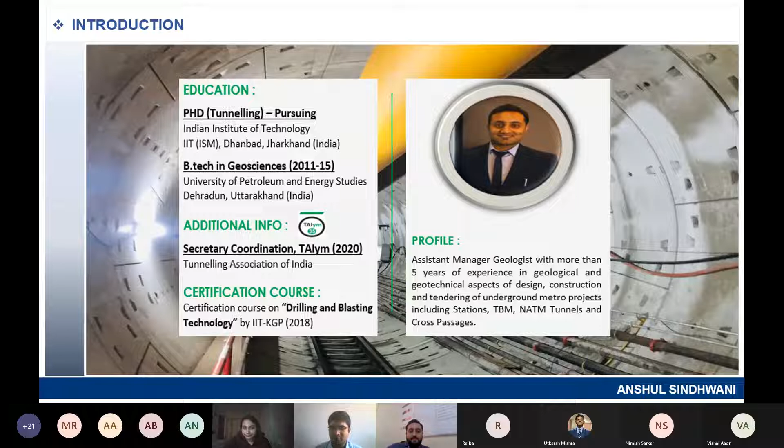So moving further to the topic, probably this is the slide most favorable, or I should say the slide which you have already learned so much about.

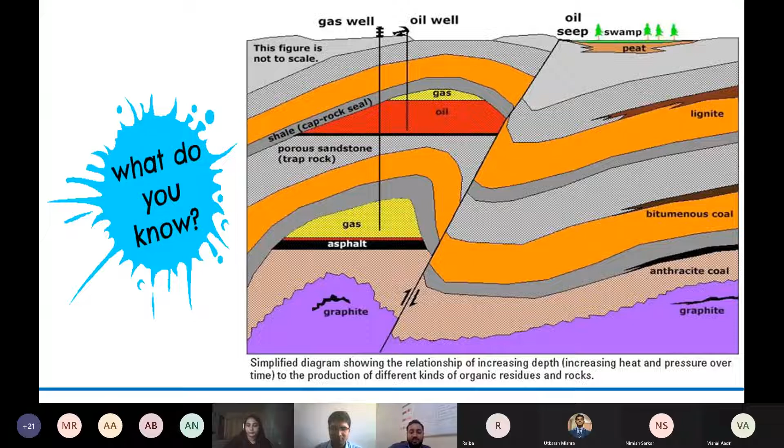Of course, it's visible that it is an anticline, syncline, fault, where exactly the gas is trapped, cap rock, reservoir, shale. These terms are probably very common for you by now since you are already pursuing from petroleum background. But what we are going to learn today is all about urban tunneling projects.

As you can see in the image, there are machines digging down below the buildings. The one is basically for metro. Most of you have already traveled across India, mainly in Delhi, Kolkata, Chennai, Hyderabad, in these underground metro trains, but you may not have been fascinated by how exactly it is being built. So this is probably the right time I'll be sharing it with you.

Just next to it, what you can see is a road tunnel where vehicles are going. This particular tunnel is being planned or constructed specifically for metro, whereas these are for road tunnels. The next one you can see is an underground basement being constructed mainly for parking. So all what I'll be discussing today is below ground things.

You might have seen metros running above the road as well, but my topic would be specifically restricted to the underground works being carried out all across the world.

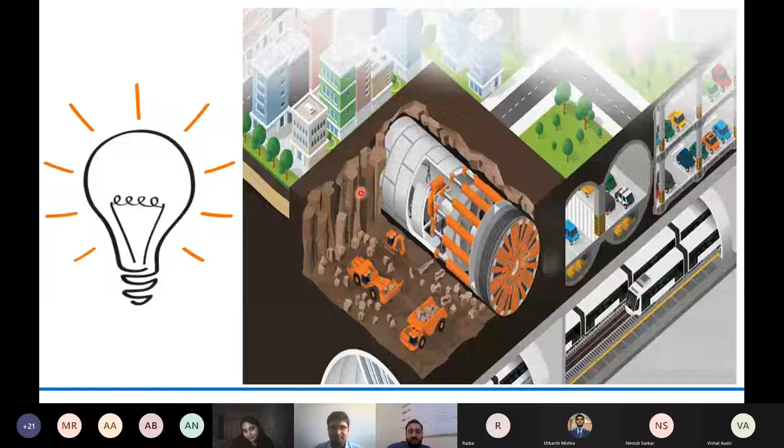Moving further, I'll brief on what I'll be covering today: starting with urban tunneling, what it indicates, what specialized team is needed for this sort of project, then basics of tunnel construction, the role of geology, geophysics, and mining in these projects, what are the challenges, and what are the career opportunities for you.

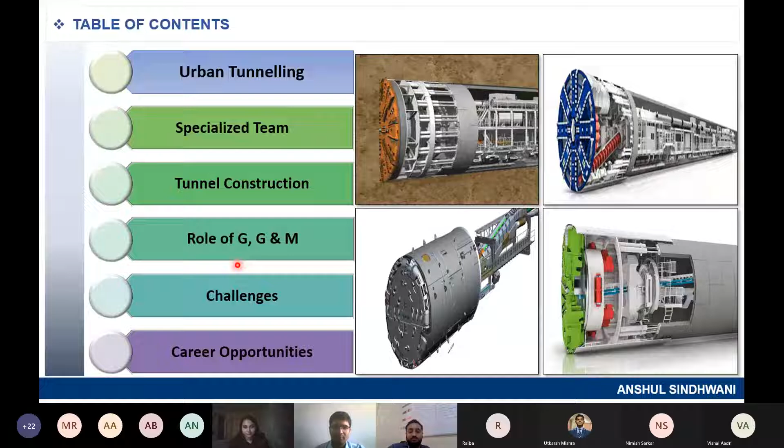Like I said in the beginning, this would be an eye opener because most of you are actually focused on oil and gas, and you may not have seen how much opportunity there is in these sort of underground projects. So what exactly is the topic known as urban tunneling?

Tunneling is nothing but a way to create space below ground for many purposes. Like I explained earlier, it could be for roadways, railways, utilities, or basements. Nowadays, many of you might have heard of a particular building in Norway where they have made something like an ice skating facility. There are many things they have built so they can earn money by taking money from tourists. So there are many applications.

I'm not exactly able to recall the name of that particular building. It is there in Norway. Norway is famous for underground spaces. As you can see on the right side, there are a lot of buildings on top, and two tunnels coming out — one going towards the city, and one coming out from the city. Nowadays, many cities in India have this sort of planning, or many projects are already under construction.

So how exactly it is being built is the question here, since we are talking about urban tunneling. The unique challenge is, since we are working below these buildings, imagine how is it even possible. As basic knowledge, if these buildings are going to remain there and these tunnels are going to be built, what is the main unique challenge that we'll be facing?

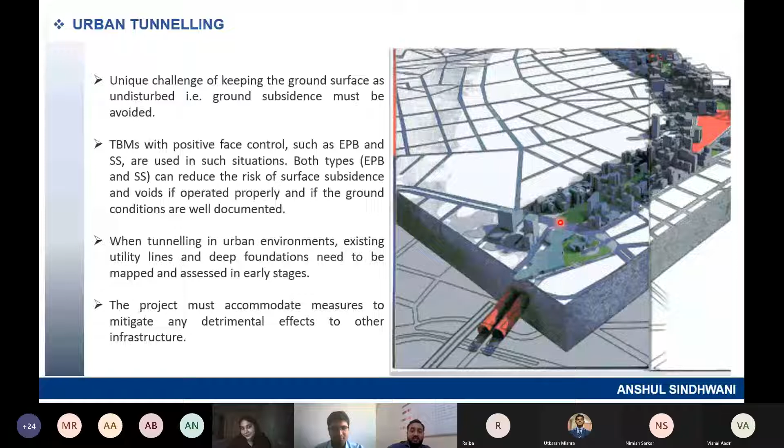Now when we are tunneling in these urban environments, there are existing utility lines like electricity, telephone, gas pipelines. All these will also be disturbed when we tunnel below the surface. So these projects definitely accommodate measures to avoid any detrimental effects to other infrastructure — meaning buildings, a cricket ground, a university, or any sort of structure that needs to be protected when building these sort of projects.

So basically there are two components in urban tunneling. One is the cut and cover box, from where one is either going to go in or come out, and then there is the tunnel part. Now these tunnels can be built by different methods that I'll explain later.

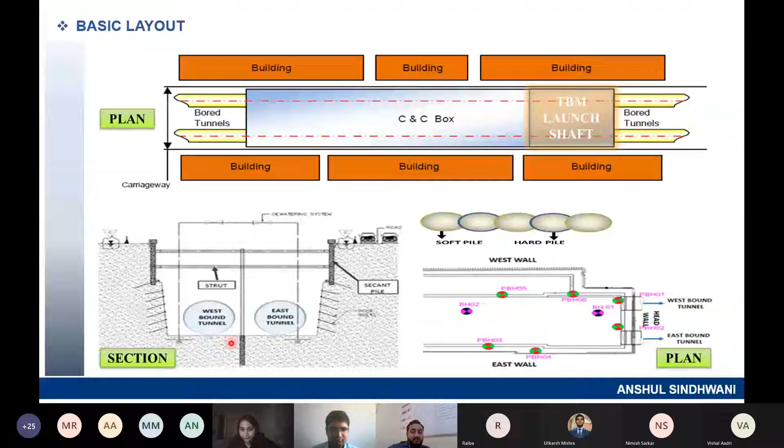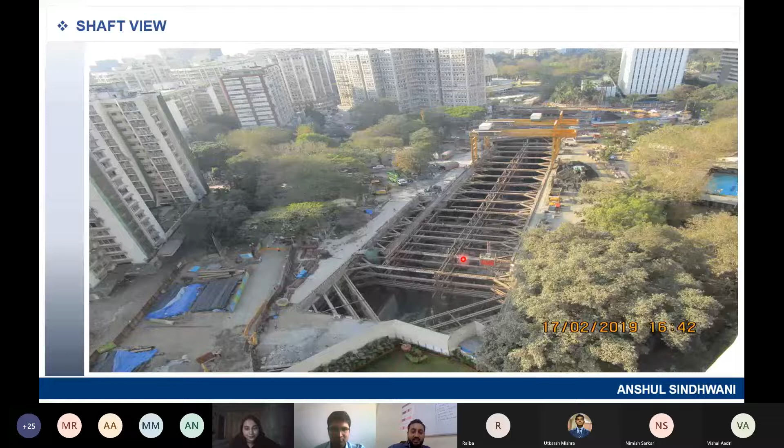During the construction stage, this is one of the stations we are constructing in Mumbai, near Nariman Point. Probably many of you are from this place and aware of it. As you can see, on all four sides we have buildings, and in between there is a station from where tunnels will be on both sides, one on this side and one on this side. Of course there are twin tunnels, so one is coming in, one is going out. This is how it looks during construction. Once the station is built fully, there will be no object visible on top, only entry points, so this place will be restored as it was before construction started.

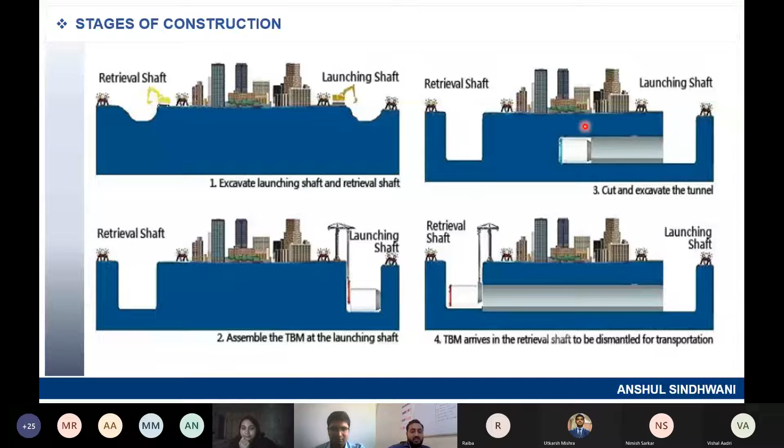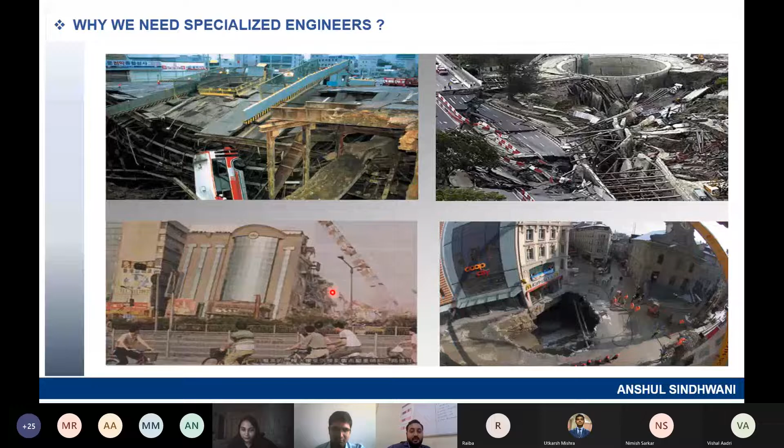So why am I explaining all this? It's to give you a feeling of why geology, geophysical and mining engineers are actually needed for these sorts of works. This cannot be done by anyone, or I should say only civil engineers - it's not possible at all by civil engineers alone. Imagine high-rise buildings on top, and you need to create a hole below the surface. Is it really possible that these buildings will stay safe? There are certain risks, but they can only be mitigated by these specialized engineers I was referring to. Imagine if these projects were only built by civil engineers with no geologist, geophysicist or mining engineer involved - you can see in images how catastrophic collapses can happen. I'm not saying these projects are being built without geologists and other engineers. All I'm saying is how catastrophic failures can be if even certain ground importance is ignored at any point of time.

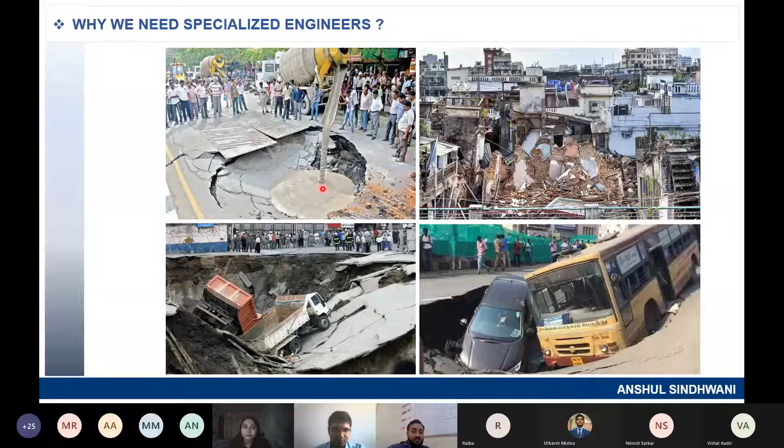So all I'm trying to give you a feel here is that for all these sorts of works, there are specialized engineers required, which I have already mentioned. Otherwise, you can see in these figures how catastrophic failures can happen.

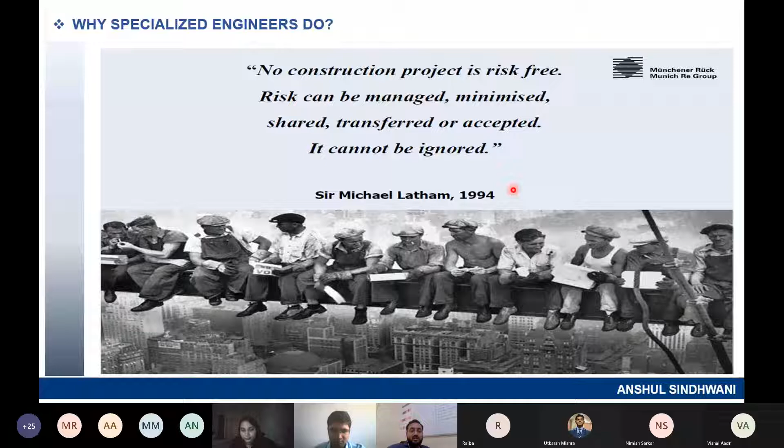Why we need specialized engineers is because these engineers can manage the risk, minimize it, share it, transfer it, or accept it. It cannot be ignored. When I am there as a geologist working on these projects, if I feel there is anything important to communicate to higher management, I do it, because I cannot take the risk of any building collapsing in front of my eyes. Similarly, specialized engineers work in their own departments to ensure all buildings are safe and whatever we construct should continue to stand forever.

Now, there are two components in this: one is tunnel, second is station. The station, I've already told you, is a cut and cover construction.

Tunnels are constructed by different methods. There are two main methods: one is the drill and blast method, and the other is tunnel boring machines. Those from mining will definitely be aware of blasting activities carried out in mines. Tunnel boring machine is a mechanized tunneling method, done all across the world. It is one of the most advanced machines available and one of the most used worldwide.

Now, for constructing tunnels by these two methods, there are different approaches available: one is the New Austrian Tunneling Method, one is the Norwegian Tunneling Method, and then there's the Adeco-RS. There are also different tunnel design methods available. I haven't kept this presentation at a very micro detail level, because you may lose your way. I've kept it introductory, so you at least come to know this side of things as well, not just the part you're mostly studying, which is oil and gas.

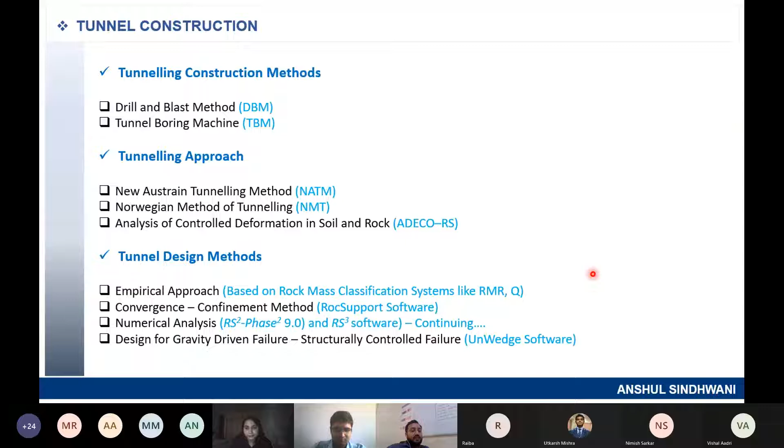So a tunnel boring machine is a mechanized tunneling method. What you can see is circular tunnels. As I said initially, it's built for different purposes—for example, for metro, the diameter of this TBM is mostly around 6.5 to 7 meters. Whereas the mega TBMs used around the world have a maximum diameter of around 15 to 16 meters, and the minimum diameter available for utility tunnels is around 1 to 2 meters.

Basically, what this machine does is mine whatever is in front of it—it could be soil or rock. Depending on the type of ground conditions, which is where the role of the geologist comes into picture, the type of machine will be decided. There are different types. Before moving further, I'll show a short video on TBM so you get a gist of what I'm talking about.

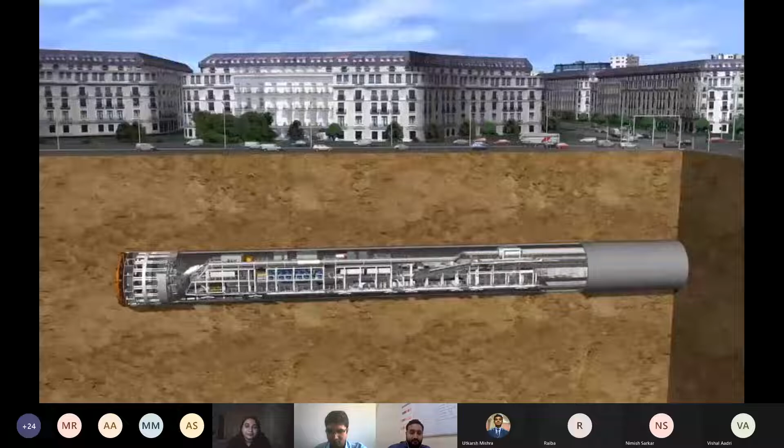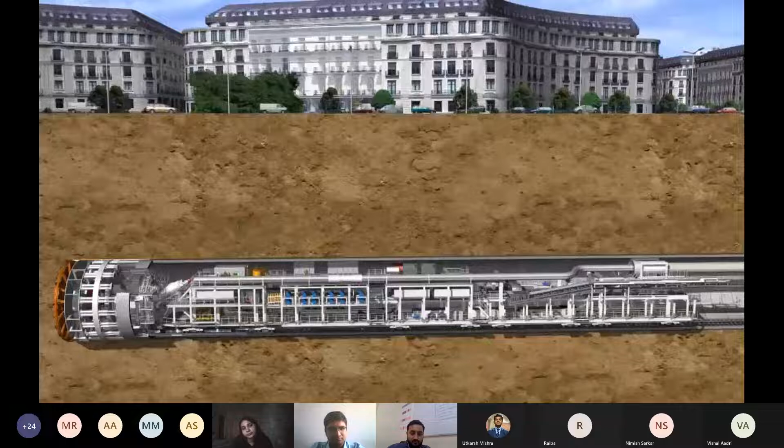Zona Universitaria. The tunnel route crosses beneath Barcelona's historic city center, densely populated residential areas and roads. In order to avoid any damage to sensitive buildings, subsidence, heave, and vibrations must be avoided at all costs. In addition, the impact on traffic above ground must remain as small as possible. The S442 is a classic EPB machine with an outer diameter of 12.06 meters and a total length of 95 meters.

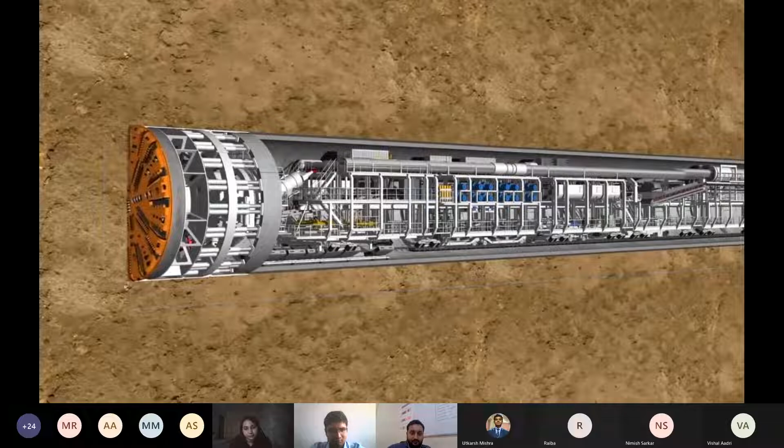With its rotating cutting wheel, the tunneling machine breaks the material from the tunnel face. The material is then transferred to the belt conveyor system in the rear of the shield via a screw conveyor, while the hydraulic cylinders press the machine forward continuously.

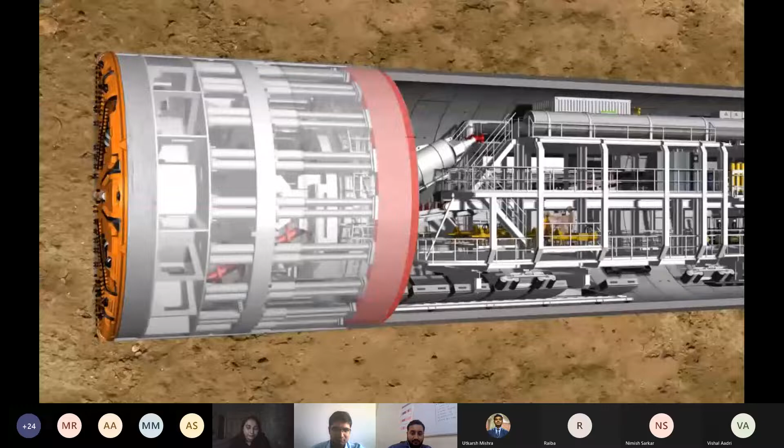The reinforced concrete segments, known as lining segments, are installed under the protection of the shield skin. When the ring building has been completed, the machine can push itself against the new tunnel ring and drill further into the soil.

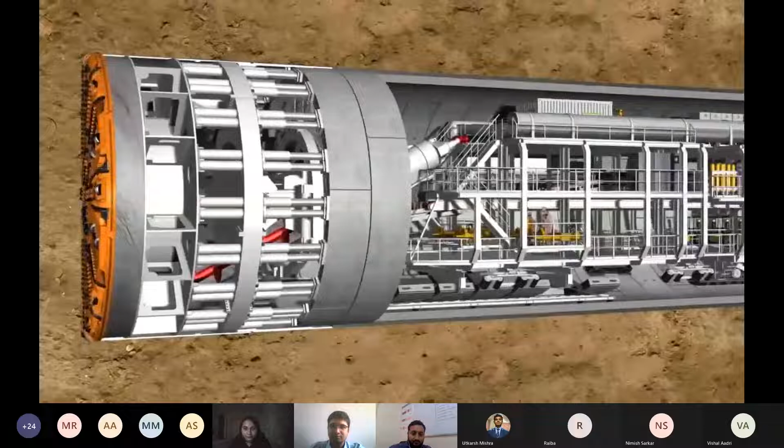The 83-meter-long backup accommodates all logistic facilities necessary for the operation of the overall system. The working method of an EPB shield is basically made up of two phases, the tunneling phase and the ring building phase.

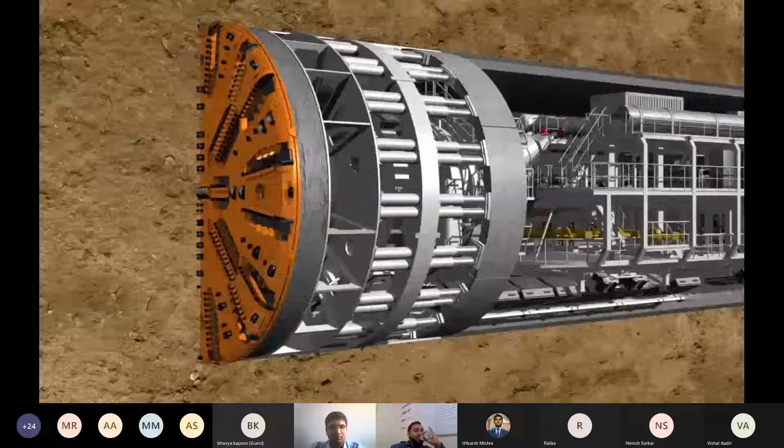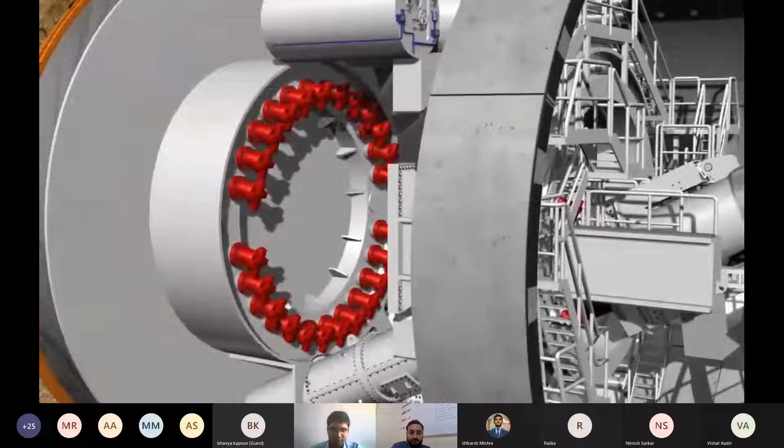During the tunneling phase, the cutting wheel, which rotates at a speed of up to 2.7 revolutions per minute, is pressed against the tunnel face with a pressure of up to 400 bar by means of hydraulic cylinders. 24 hydraulic motors drive the cutting wheel via a gear rim, developing a drilling torque of up to 38,000 kilonewton meters.

Under this high pressure, the disc cutters and cutting knives made of high-strength steel loosen the material at the tunnel face.

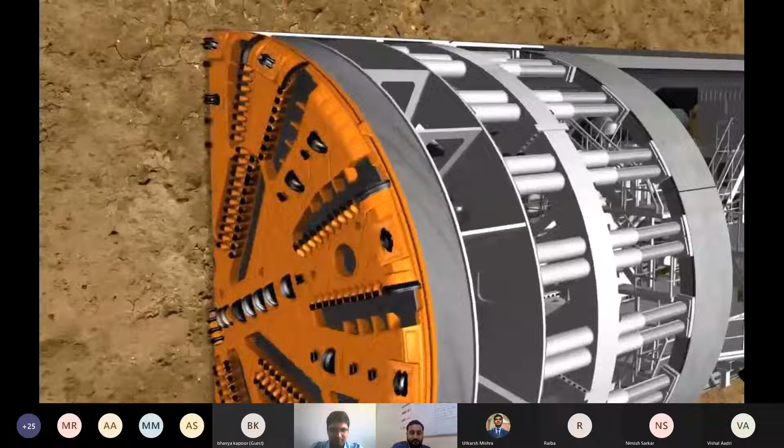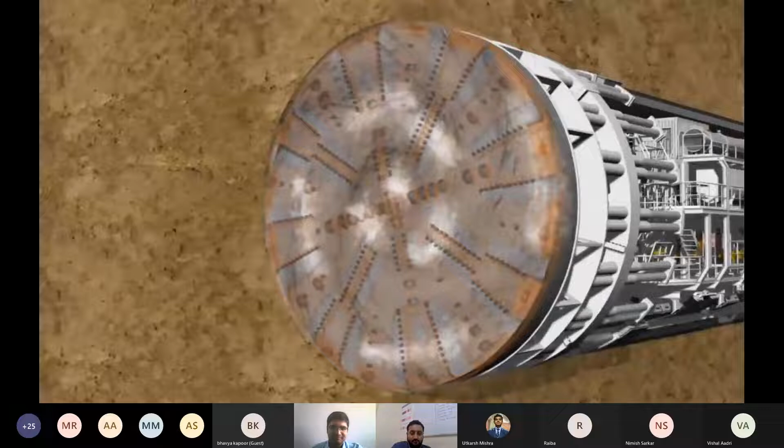If necessary, the soil can be conditioned with water, bentonite, or foam using the injection systems located on the backup. With the help of nozzles integrated into the cutting wheel, the corresponding conditioning medium is injected into the soil, which is pressed into the excavation chamber by the existing earth and groundwater pressure.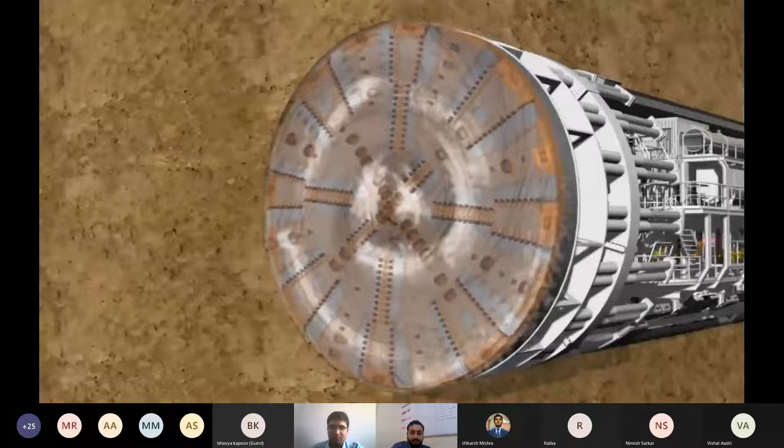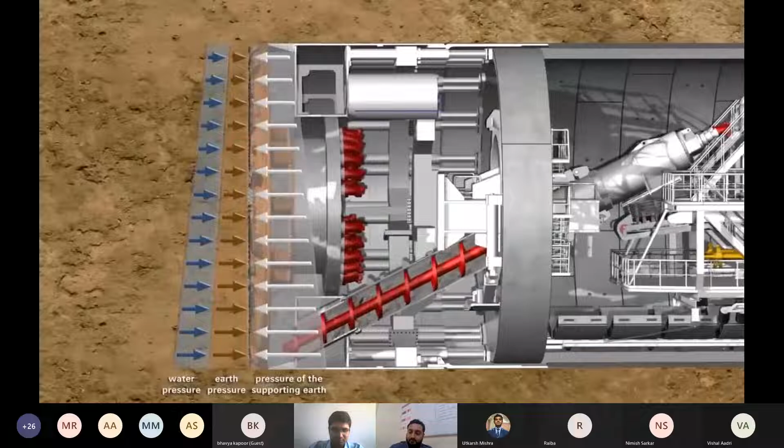For shield tunneling in non-stable soils, a loss in stability at the tunnel face is compensated by creating a support pressure. In the case of the earth pressure balance shield, the soil which was excavated by the cutting wheel is used to support the tunnel face.

In order to reach a state of equilibrium, the support pressure is transferred by the hydraulic cylinders via the bulkhead to the soil, which avoids an uncontrolled penetration.

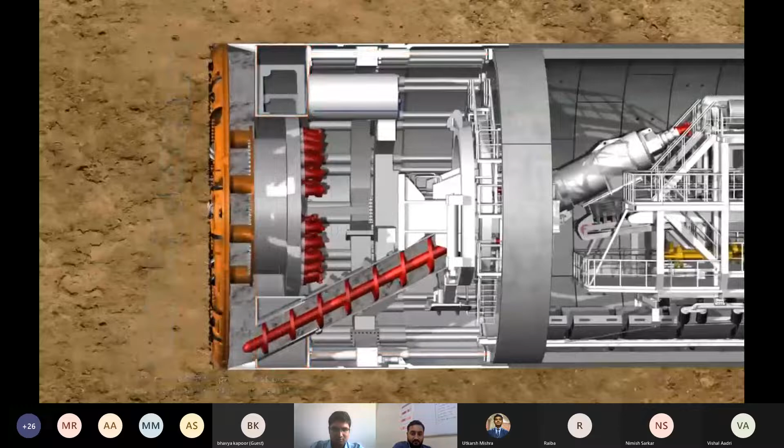The soil prepared in this way can now be transported from the invert area of the excavation chamber to a belt conveyor by a screw conveyor. The screw conveyor is driven by 2 hydraulic motors which have a power of up to 400 kilowatts.

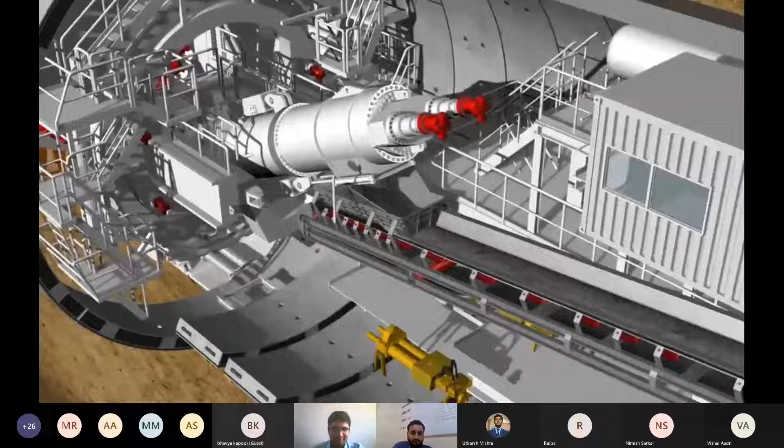The quantity of the soil taken from the excavation chamber is regulated by the screw conveyor's rotational speed, which is matched to the advance speed. The aim is to maintain a state of equilibrium between the quantity of soil removed by the screw conveyor and the quantity of soil accumulated from the shield's tunneling process. This guarantees optimum support for the tunnel face.

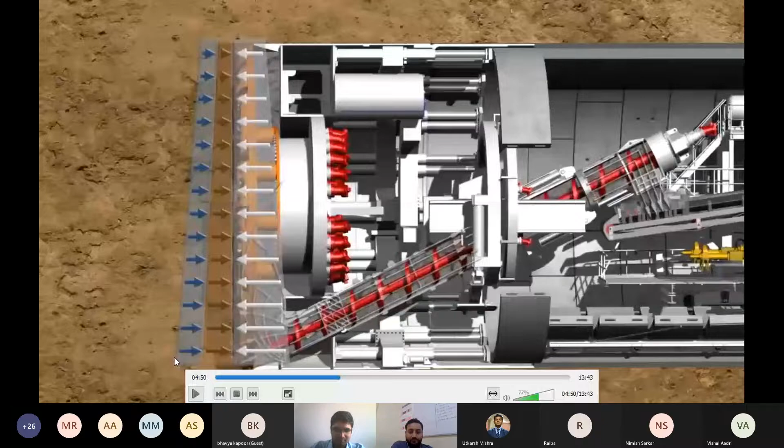So I hope you might have understood the TBM, how exactly it works. Of course, it's a basic idea, and the intention is just to introduce what exactly these TBMs are, how exactly they move forward.

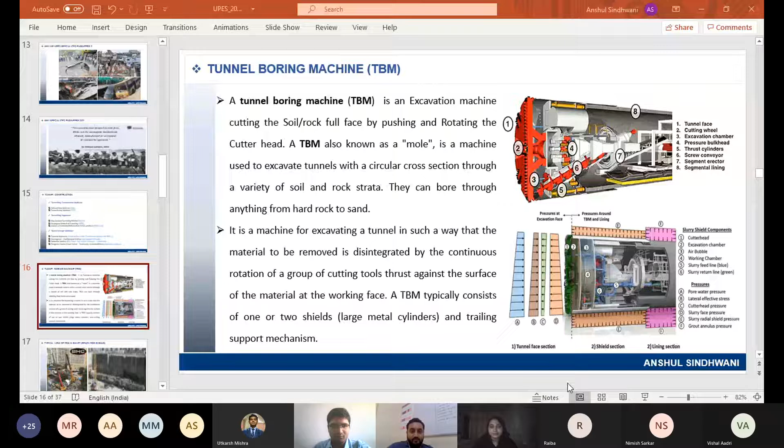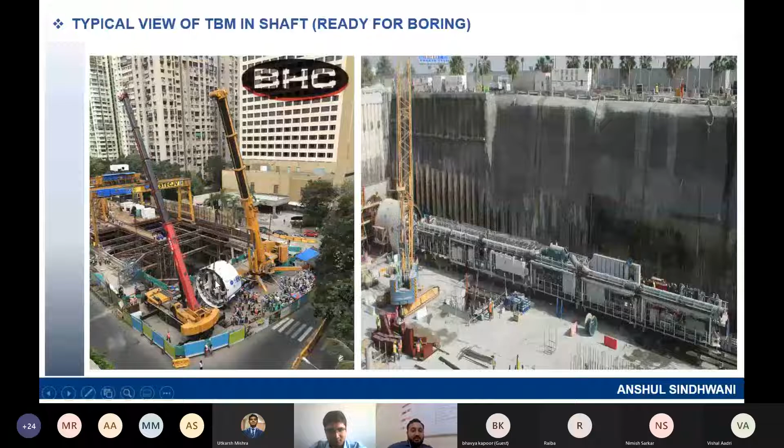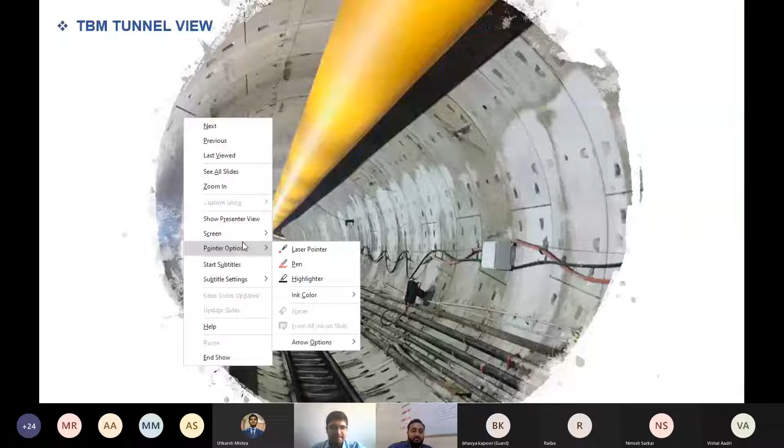So you have already seen in the video that when the TBM is moving forward, basically these concrete segments are being installed at the back, and you can see now a finished tunnel, how exactly it looks like. You might have already seen this while traveling in metro. Of course, these much lights are not there when you are traveling between two stations, but this is something how it looks like.

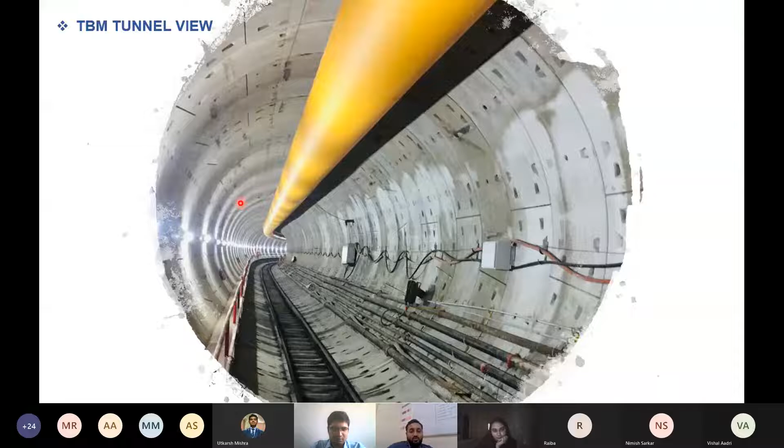Like I said initially, there are two methods by which we can construct a tunnel. One is TBM, which is nothing but tunnel boring machine, and the second way is to do it by NATM, which is new Austrian tunneling method. So this is how we build a tunnel. Of course, the rates are different in different types of tunneling.

So what we do in these tunnels is we drill holes on the face, then we charge it, and then we blast it. The same case happens in mines, the same way we also build, though of course the method of construction is different. Like I said, it's the new Austrian tunneling method, whereas in mines there are different methods being adopted at different places. Then what we do is install different sorts of supports because we are excavating this.

Imagine if this is soil and you are creating a hole below 20 meters, everything will collapse and it will not retain. So like in the machine also, you might have noticed that an equilibrium has to be maintained. In this case also, if you are not providing any support to the ground which is exposed by this hole, it will collapse.

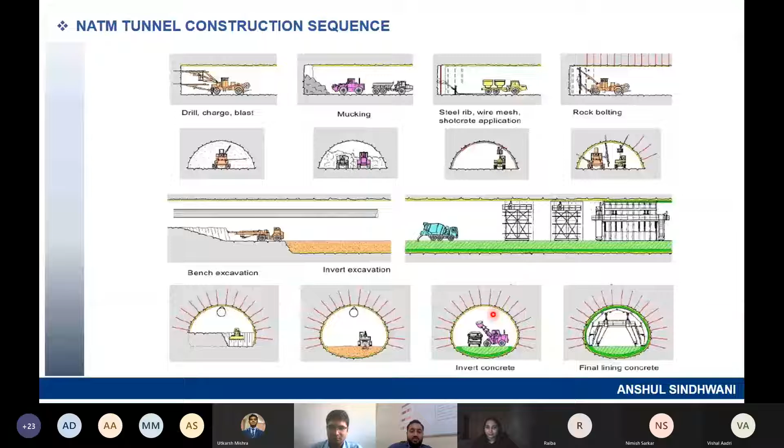So what we do is we support it with different types like steel rib, shotcrete application, and rock bolting, and this is how it looks once the tunnel is being built. In this particular method, whatever shape we want, we can construct, whereas in TBMs, mostly as of today, circular TBMs are being built and manufactured.

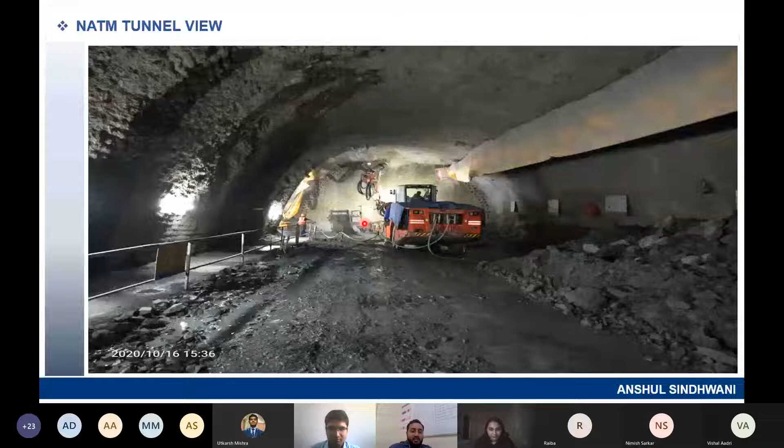China has recently worked on many TBMs in rectangular shape for different subway constructions. So moving further, this is an image of a NATM tunnel being constructed. You can see there is a drill jumbo standing here, and small holes all around the periphery and on the face, which are intended to be blasted. So these are the two different types of tunnel methods by which a tunnel between two stations is constructed.

Now, here comes the main role of today's presentation. You have already got a gist of how exactly a station is being built, a tunnel is being built, and how exactly it looks, where exactly it is located. Like I said, it's urban tunneling, so it's mostly below the building. So how are you able to construct it? You have already got a gist of it.

Now, while I was talking about all these parameters or probably new words for you, you might have already figured out why the role of geology, geophysics, mining, and geoinformatics is required. So you will come to know now. Many sorts of surveys or investigations are done before the start of any project or construction, and even during construction and post-construction as well. Many activities are there which involve these specialized engineers.

Starting with the first survey, which is known as topographical survey. When we are constructing any sort of project within these cities, many features like buildings, roads, trees, manholes, cables, and poles all need to be plotted in one particular drawing, where people from geoinformatics are aware of the big role played by GIS software or topographic maps. So with the help of these engineers, we build these survey drawings.

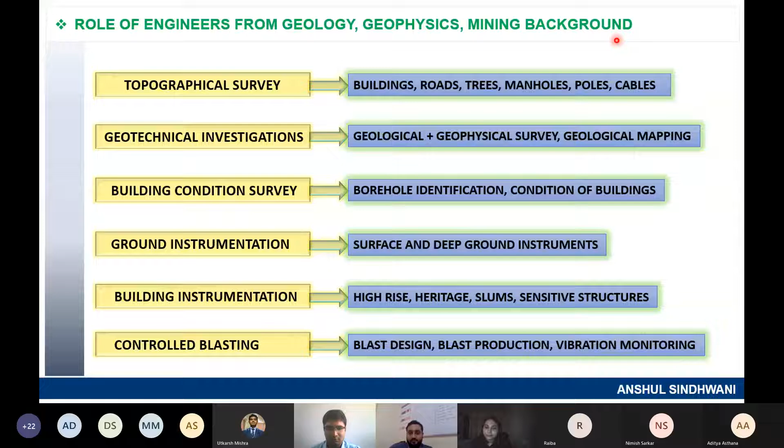For TBM, these parameters about what exactly is ahead of the TBM need to be identified. I was speaking in generic terms, but now these details show what exactly we look for when we go just next to the cutter head region, from where these wheels are rotating. These are the sort of parameters we actually look for.

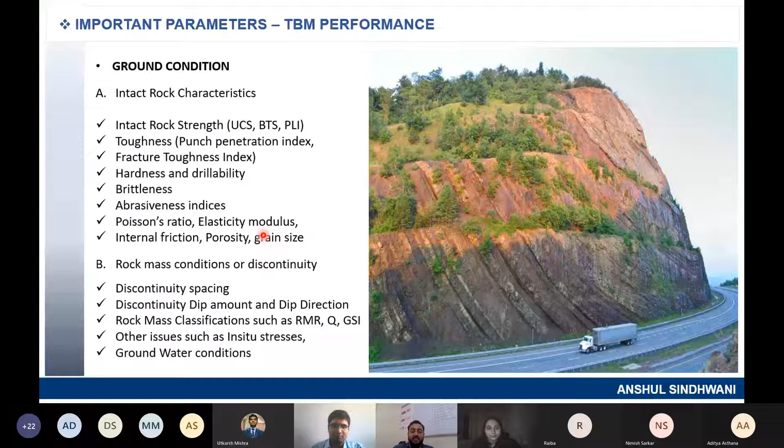Most of you might have already studied engineering geology and rock mass classifications, so you may be aware of discontinuities and rock mass classification systems. In rock mechanics and soil mechanics, you would have studied UCS, BTS, and PLI. All these parameters are what we look for when going ahead of the TBM, or even before the TBM arrives. We map these things, test them in the laboratory, and make sure the right TBM is selected based on these parameters.

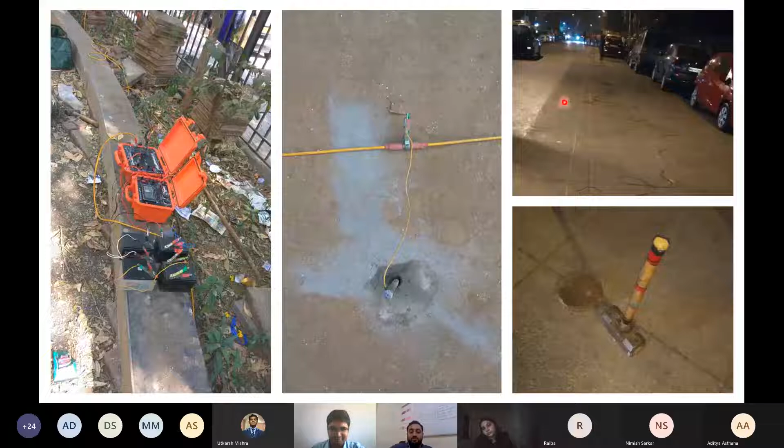This is a geotechnical investigation, done the same way as exploratory drilling. In oil and gas, the barges and land exploratory drilling rigs are quite big, whereas these are very small in nature because they are intended only for shallow depth, while oil and gas drilling is much deeper.

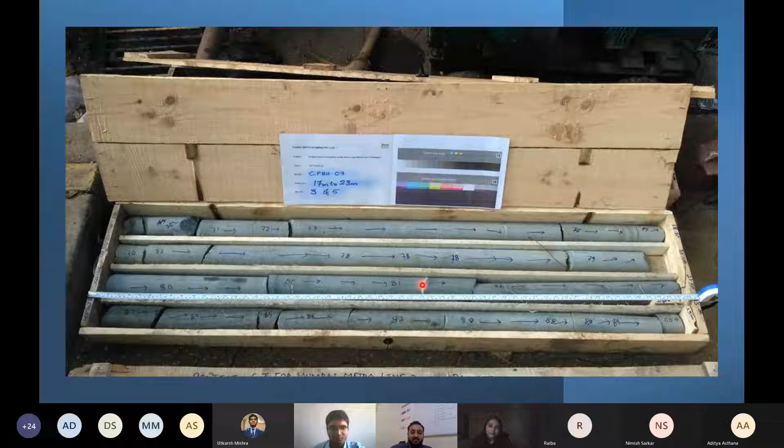Up to the previous slide, it was all about the tests and how they are done - this is about what exactly we get. You can see the cores being recovered and mapped. The parameters I just explained in the previous slide are looked upon from these rock cores - what type is there, what infilling is there - all these things are mapped.

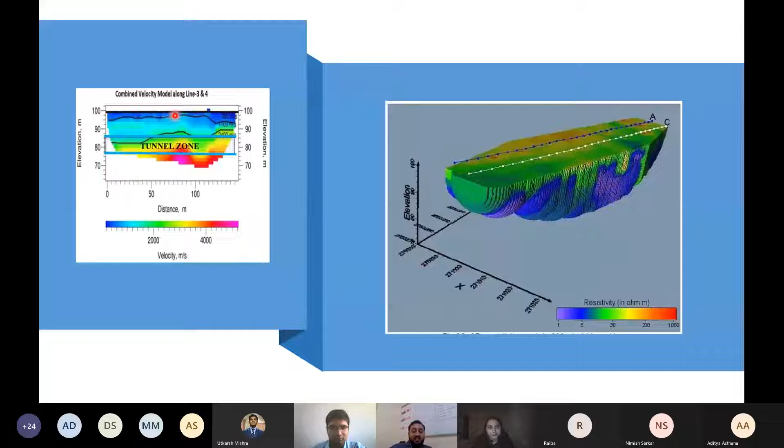These are the results of SRT and ERT. You can see the two lines on top showing the alignment of the tunnel, while the bottom shows what exactly the strata is. Similarly, on the left side, two lines show the tunnel section below ground, and then the different layers show different velocities indicating different types of ground.

Now, I have kept one video for blasting, because this blasting is done in a controlled manner. We are working near British Terminal, or Victoria Terminal, also known as CST in Mumbai - right next to heritage buildings built by the British, which are 150 years old. So you can imagine the blasting cannot be done the way it is done in mining.

So it is being done in a very controlled way, as you can see in the video. I'll just show it again.

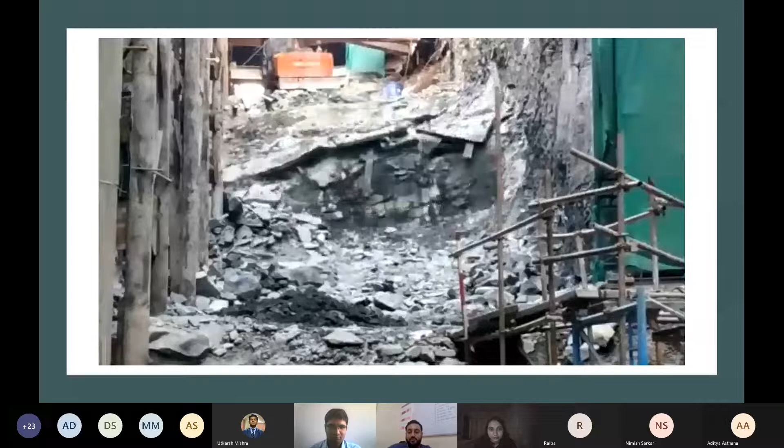Moving further, there are of course challenges. Like I said, when we are building these projects, specialized engineers are definitely required. But even if they are there, challenges will still be there because we are actually disturbing the ground. The ground was lying there millions of years ago, but we are disturbing it now for our purpose. So challenges are there, of course.

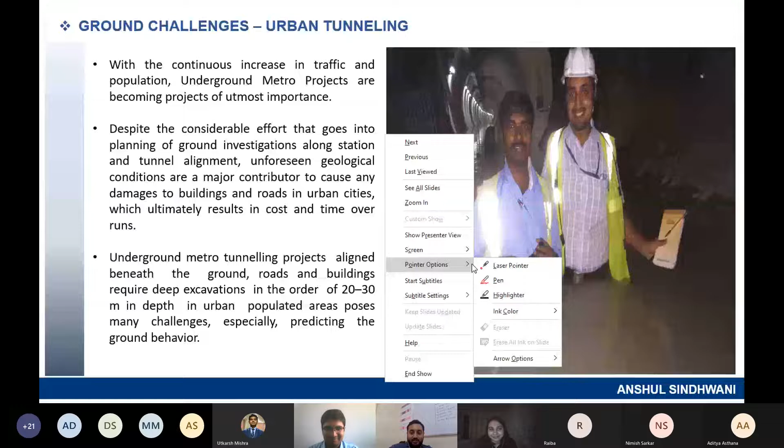You can see on the right side the image looks very smiling - it is me. But at the bottom, water is there and it is touching my belt, so you can imagine I'm standing inside a tunnel. This picture is from Chennai Metro back in 2016, where floods occurred. It was late 2015 or early 2016, I don't remember the exact date, but because of the floods and some construction activity, entire flooding happened inside this tunnel, and the two of us went inside to check if everything was okay.

So imagine, if you are disturbing these grounds and buildings are there on top, roads are there on top, traffic is running all around, you need to be cautious enough. You need to take into consideration the geological and geophysical aspects, and at the same time do as much investigation as possible to get a fair enough idea of what exactly lies below the ground.

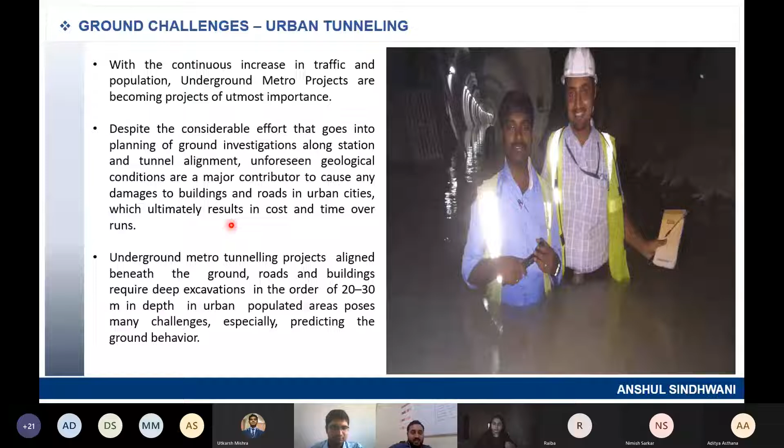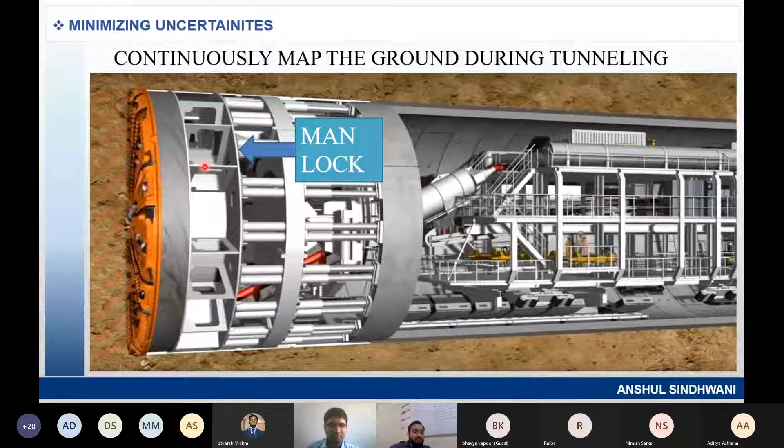So this is a picture of me, and this is the cutter head you can see here, and you can imagine the space within this tunnel. As far as I remember, the diameter of that opening is only 800mm, which is less than 1 meter, and we need to enter from that opening itself. So you can imagine how difficult it would be.

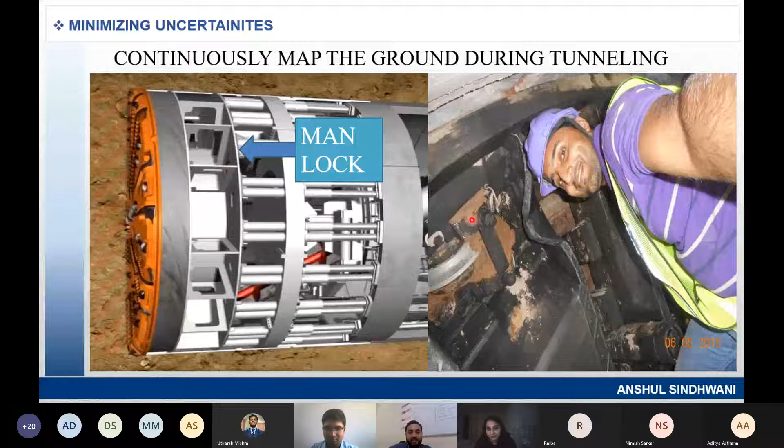And this photo shows the rock ahead of the TBM. From this exposed rock outcrop, we map this - we make sure we know exactly how this rock will behave. As a geologist, as a geophysicist, we should know. Some testing can also be done, like SRT or ERT, conducted along the sides of this TBM. So a lot of scope is there for geological and geophysical students who have learned this background.

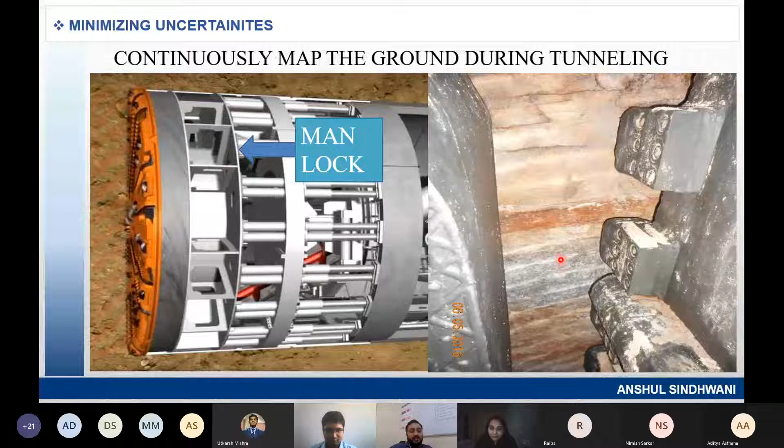What else you can see is that this is just an opening, but on the other side there are rotators, which are used to cut the rock. This is an image from Delhi Metro where the rock has a strength of 350 megapascals, so hard that with these small cutters it was not at all possible - this was a surprise for us. That's the reason these geological parameters are very important for TBM selection, because once the TBM arrives, it cannot go back and another TBM cannot enter in its place. We need to proceed with this TBM itself. That's why we say it's important to get the data first and then decide on the TBM.

So this would be of more interest to you guys - the career opportunities in underground construction. Like I said earlier, similar to AAPG or SPE, there's also ITA - the International Tunneling and Underground Space Association. And UCA is also there, which promotes the industry the same way the chapters in oil and gas do. They provide scholarships for young engineers who have graduated from different backgrounds, sponsoring post-graduate courses endorsed by this ITA society. These courses are located in different countries - there are 4 to 5 courses I remember, and you can apply for any of these along with the scholarship. If selected, your course would be fully funded by this organization. At the same time, this is a boon to society in the current scenario, as most Indian cities are coming up with metro projects.

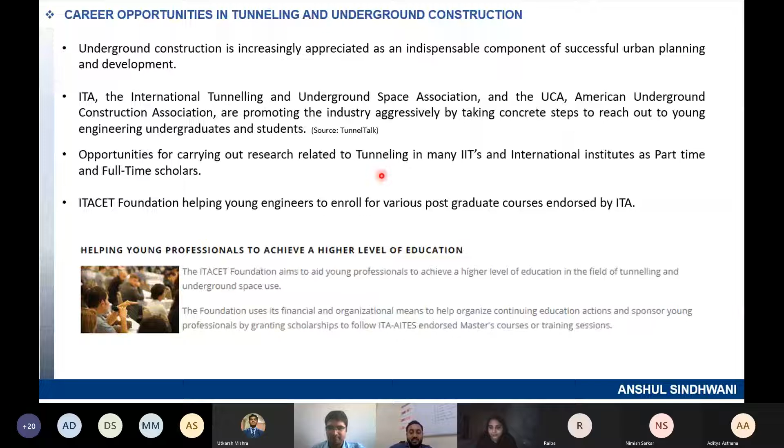People from different states and cities have probably already heard a lot about these metro projects, but they are not aware of the opportunities I'm talking about now. I'll give further details on where exactly these metro projects are already planned in the coming slides, along with which projects are being approved and which are already ongoing construction projects. With this list, you will get a feeling that there are so many jobs in this field, and the main advantage is you get a chance to stay in the city itself.

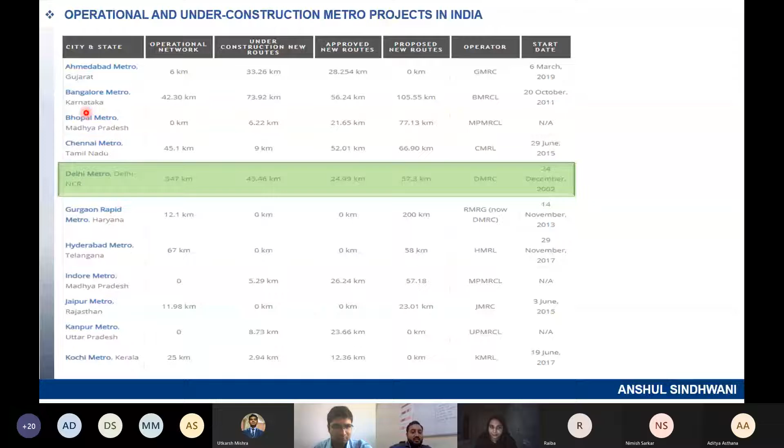This is a list of operational and under-construction metro projects in India as on date: Ahmedabad Metro, Bangalore Metro, Bhopal, Chennai, Delhi. Delhi has already built one of the largest networks in India, somewhere around 350 kilometers, and it started long back in 2002. Then there is Gurgaon Metro, Hyderabad, Indore, Jaipur, Kanpur, Kochi. All these cities have already constructed something, so it is operational, and some part is under construction stage as well.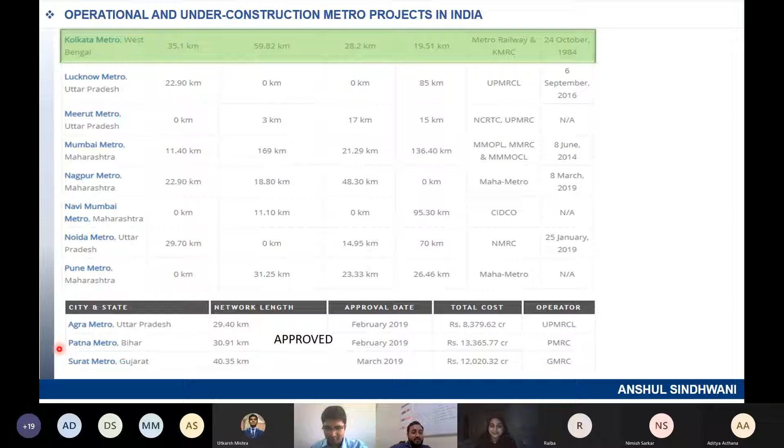Then these three are the ones which have been recently approved and are in the tendering stage as of now. Agra - you will have a metro next to Taj Mahal, so probably those who are even planning to visit can, within 4 to 5 years, go with metro also. Then you have Patna and Surat. Surat is coming up very shortly.

With that, I would like to end the presentation. You guys are welcome to ask any questions or queries you have. Thank you.